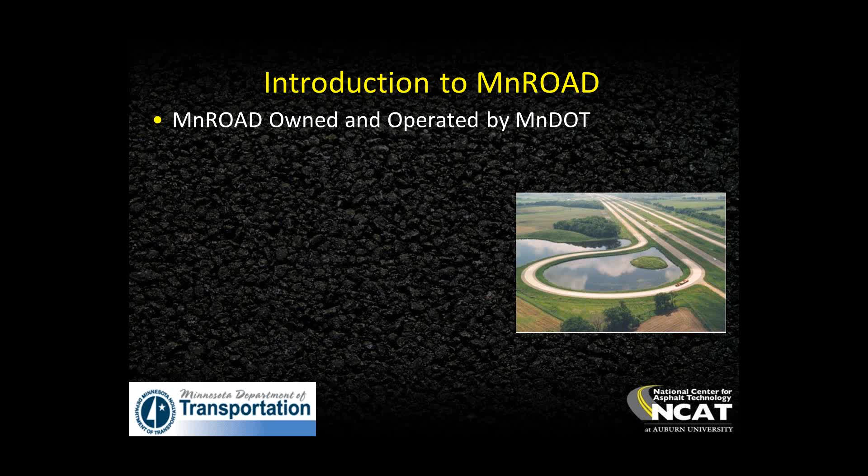MnROAD is owned and operated by Minnesota DOT. We've had 20 years of long-term customer service. Some of our customers have included Minnesota Department of Transportation, the Minnesota Local Road Research Board, which is cities and counties of Minnesota. We've done a lot of pooled funds with states and industry. Thanks again for listening.

Excuse me? Jason, are you hearing me? Yeah, you're fine.

Okay, we work with SHRP 2 and FHWA on national events, different types of pavement projects throughout the years. We've gone through our first 2 phases of research and now are finishing up our second phase, which is finishing up in 2016. Currently we're looking at our 3rd phase and looking at becoming more of a national facility to address different pavement questions that we have.

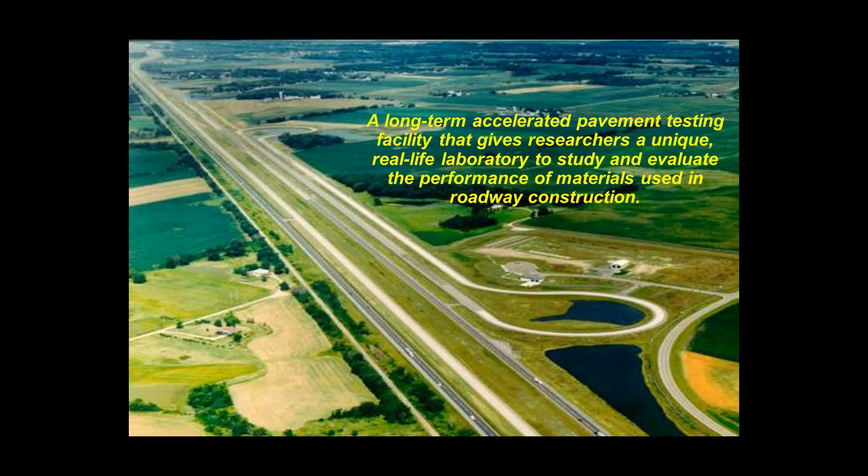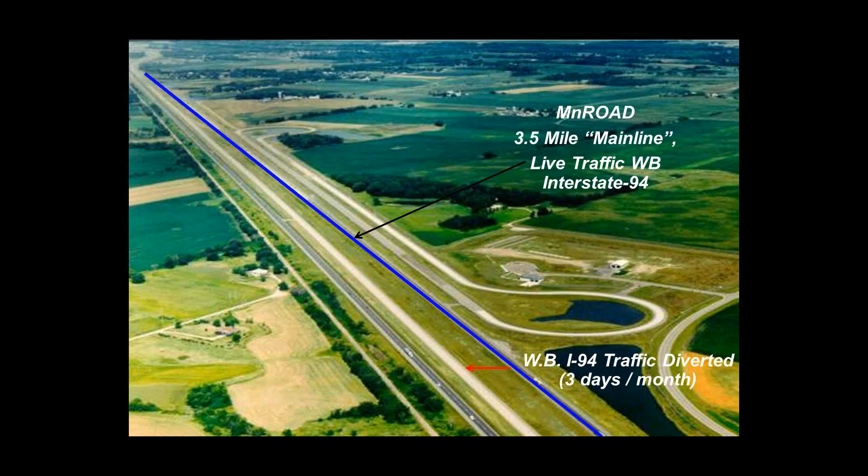MnROAD is an accelerated pavement testing facility located just northwest of Minneapolis-St. Paul. We built the sections along existing Interstate I-94, a mainline 3.5-mile stretch of roadway alongside there that we're able to move traffic back and forth as we need to. We typically move the traffic over 3 days a month to do different monitoring on that test section.

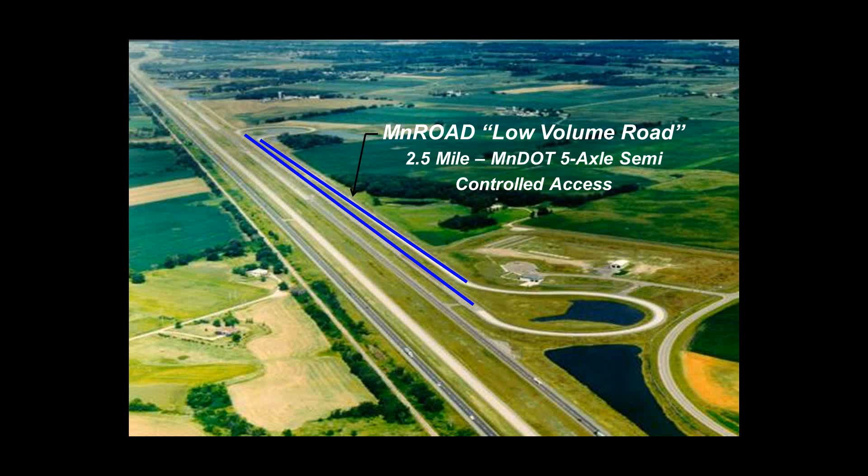We also have a controlled access low-volume road that the Local Road Research Board primarily funded to look at city and county designs. This has 2 one-mile stretches in this 2.5-mile loop.

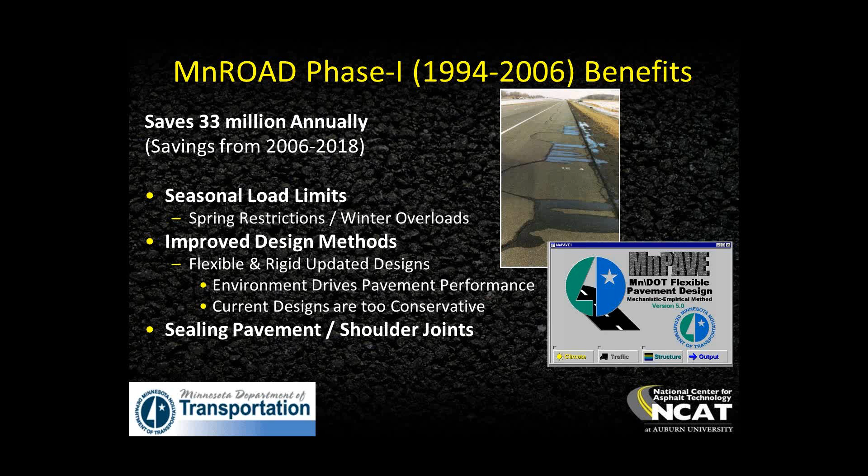Some of the benefits over the years that we've seen for our phase 1 related to developing models for predicting seasonal load limits - when to put on and take off spring restrictions and winter overloads. We've worked a lot on improving our designs used here in Minnesota and the northern states related to flexible and rigid updates. We found that environment drives pavement performance a lot more than we originally thought, and our current designs are typically much too conservative. We also found that sealing pavements and sealing shoulder joints can improve pavement performance quite a bit. These benefits saved us annually $33 million a year here in Minnesota.

Phase 2, we've been looking at the last 10 years, and we're just finishing up some of that research. We've done a lot of work relating to developing a performance test for low temperature cracking. We'll talk more about this later, but the idea is testing a material before it's placed in the road to ensure its performance.

We've also seen the power of using full depth reclamation on our roadways that are heavily cracked to remove that cracking and provide a good smooth surface. We've worked with industry and different groups on asphalt modification and the performance of those binders in our asphalt pavements. We've also worked with concrete, looking at improving concrete overlay designs, use of recycled materials in concrete including fibers, and how to diamond grind in the most effective manner. We've done a lot of work coming up with innovative diamond grinding along with concrete repairs.

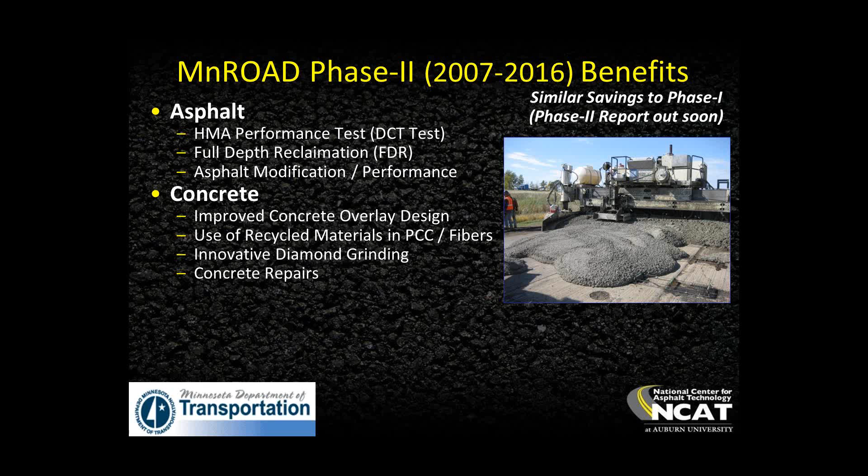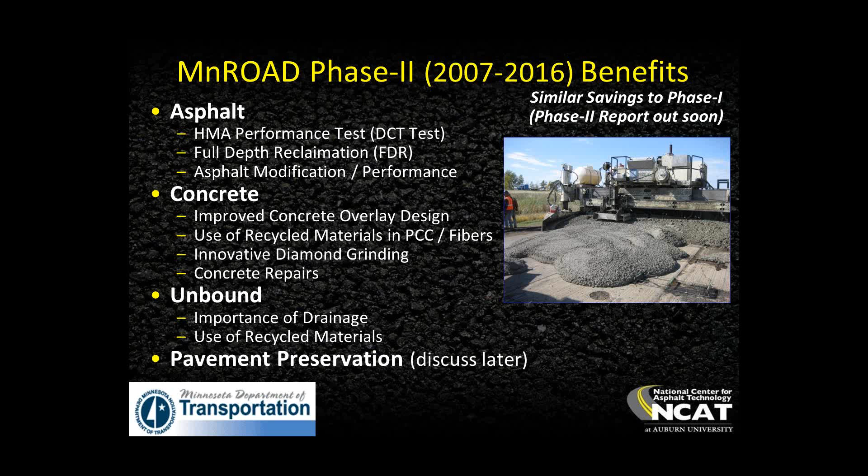We also found that unbound materials - we've done quite a bit of research related to the importance of drainage and coming up with a stable but drainable type of base, and how the use of recycled materials impacts performance and how those can be used most effectively in our roadways through the seasons that we go through. We'll talk a little more about pavement preservation later in this presentation.

Some of the future research we're looking at for our 3rd phase, when we come to it in 2017, is utilizing existing mainline old westbound concrete sections. We could do a lot of different overlays related to reflective cracking, and also utilizing the low volume road, looking at concrete and asphalt materials. Pavement preservation and rehabilitation will probably be the primary focus, along with some new construction.

Again, the strength of MnROAD is the same as the strength of NCAT in a lot of ways - we have a controlled real-life experiment with very little impact and risk to the public. We've been going on for quite a few years, since 1994. We've had long-term local support and experienced MnDOT staff that we've developed over the years to handle all the instrumentation, monitoring, and working with the different research studies we work on.

Again, we're coming up with accelerated findings and trying to get those implemented as fast as we can to get the benefits for our society. We've had local and national efforts.

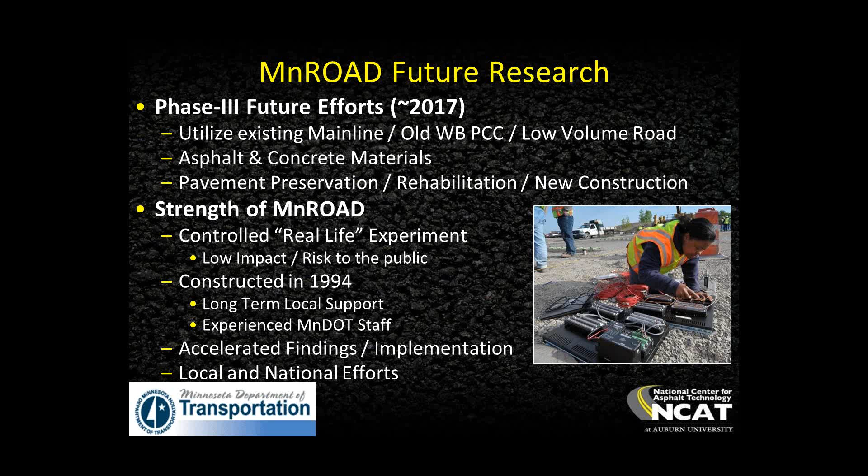We'll be going through some of these coming up at the start of February - we have a workshop here in Minnesota at the University of Minnesota, followed by an annual pavement conference. So that's our basic introduction to MnROAD, and now Randy can go into NCAT and their facility.

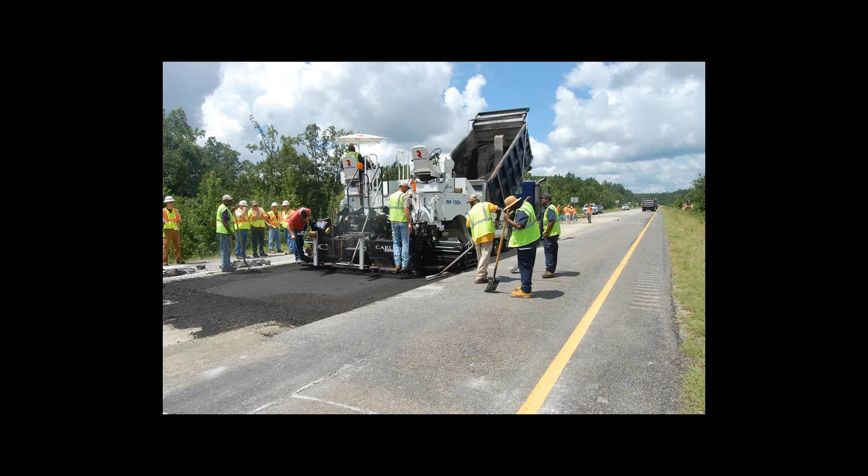The cost of each test section is based on 3 categories. The first is a surface layer experiment. The second is a full-depth structural study with stress-strain instrumentation. And the third is simply continuing traffic on a previously built test section.

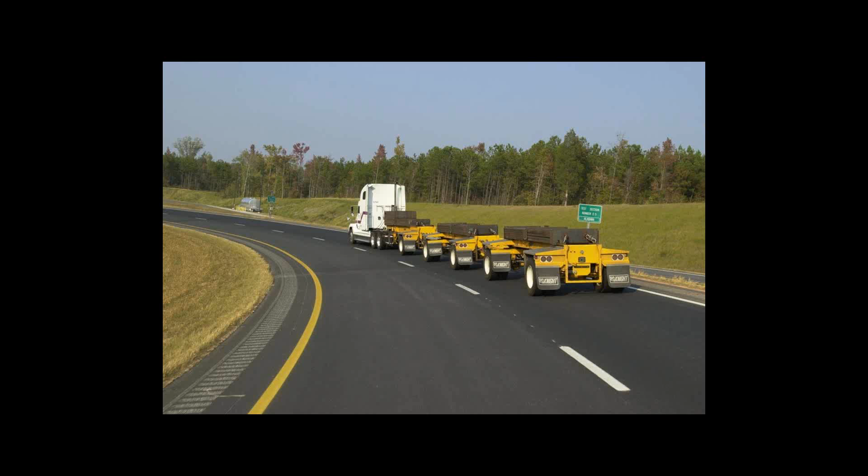We apply traffic loading with 5 trucks pulling triple trailers that run 2 8-hour shifts per day, 5 days a week. The axle loads are the maximum allowed on the interstate system. In each 3-year cycle, we apply 10 million 18-kip equivalent single axle loads.

In the first few cycles of research on the track, the focus was on refining many of the superpave specifications, such as proving fine-graded mixes work just as well as coarse-graded mixes, demonstrating the benefit of polymer-modified asphalts, and the benefits of SMA mixes. Research also showed that we should reduce the design compactive effort used in superpave mix designs.

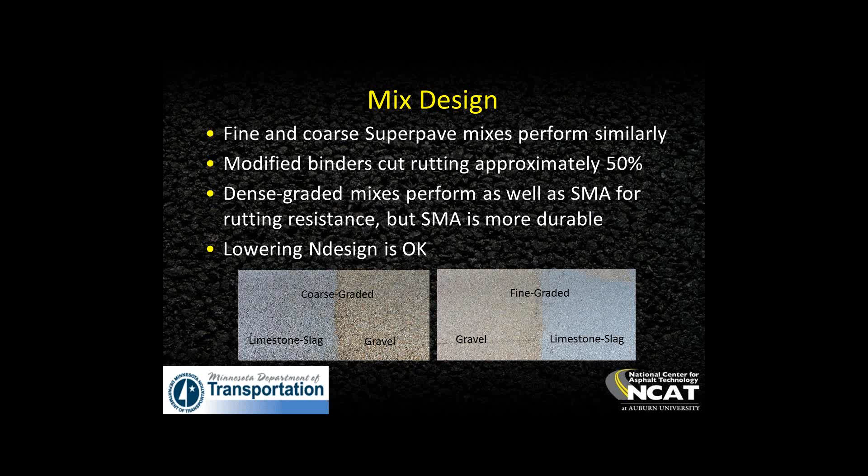Sponsors have also used the test sections to evaluate some of their aggregate specifications, and then took the findings from those and put them into practice right away, often leading to significant savings in aggregate cost in all or part of the state.

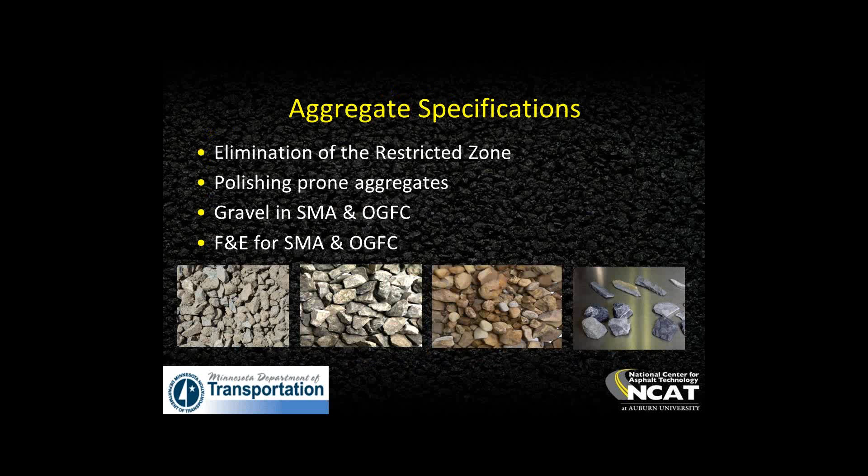Another very practical research was to find the limit for lab compacted air voids, a fairly universal pay item for asphalt construction. This research helped set the limit at which mixes should be removed and replaced.

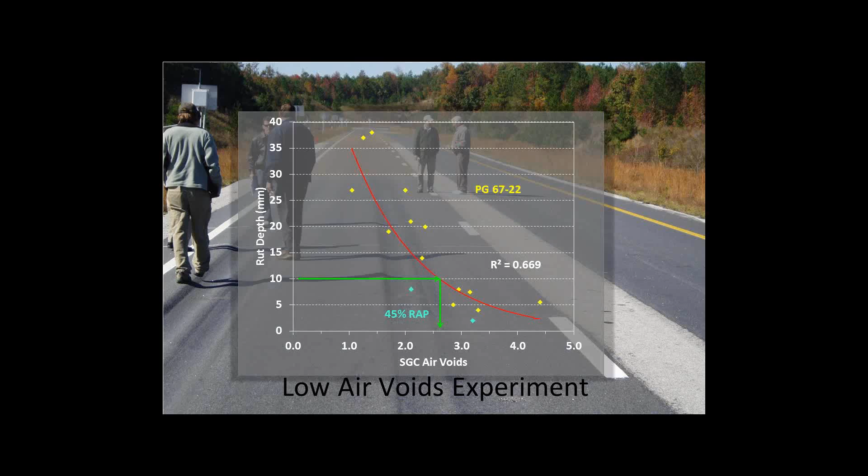In the last few cycles, the emphasis has been on the durability of pavements containing recycled materials such as RAP, recycled asphalt shingles, and ground tire rubber. We're figuring out how to optimize the mixes and the pavement structures to provide longer life and lower cost.

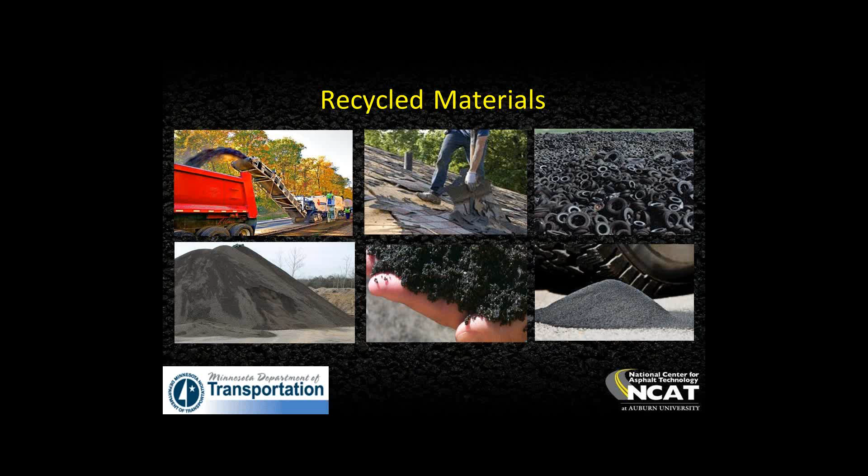We've also evaluated a variety of other mix additives to understand their added value in a real-world pavement environment. And we have also combined all of those materials with warm mix asphalt technologies in test sections.

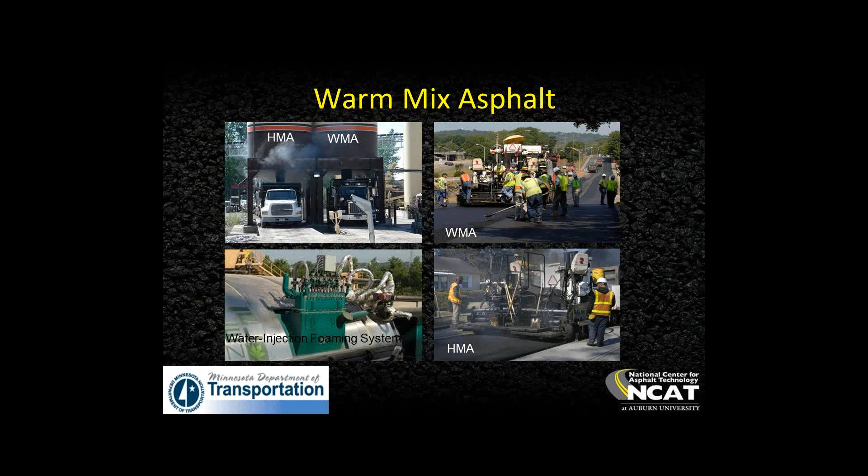The performance of each test section is very closely monitored for all forms of pavement distress, for structural health, and for friction. Some sections are designed to fail within 1 or 2 research cycles so that we can model the full life cycle of the materials and structures. Since the track is a closed facility, pavement failures do not cause any public safety issues or create political jeopardy.

The materials used in each test section are tested using the latest technology so that we can begin to establish stronger relationships between lab tests and field performance. This will enable us to better improve the specifications and performance of tomorrow's asphalt pavement.

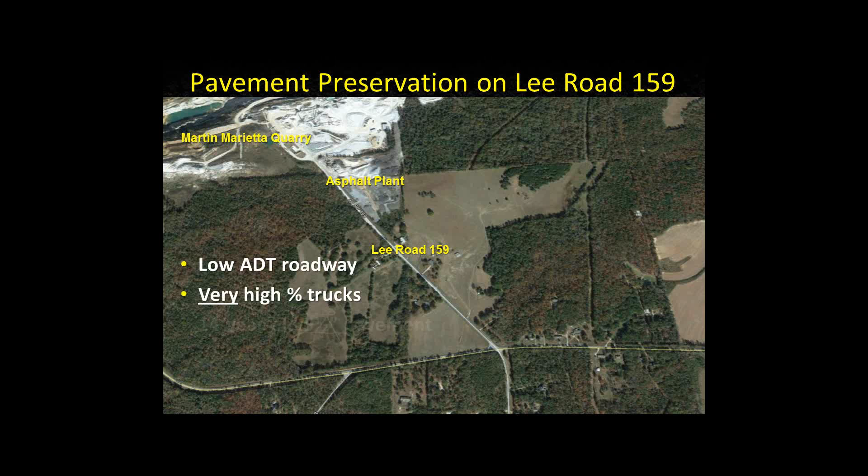In order to address this need that DOTs have, beginning in 2012, the 2012 research cycle, for the first time at the NCAT pavement test track, we built test sections off the track over on Lee Road 159. This is a very low ADT roadway with a very high percentage of trucks. It was a 14-year-old pavement, about 5.5 inches thick.

It had really diverse pavement condition because the road had evolved over time from a one-lane dirt road, widened and overlaid into a two-lane road. So between the wheel paths, there's significant differences in pavement condition. And you have empty trucks generally going into the quarry and the asphalt plant on this dead-end road, and generally loaded trucks that are leaving.

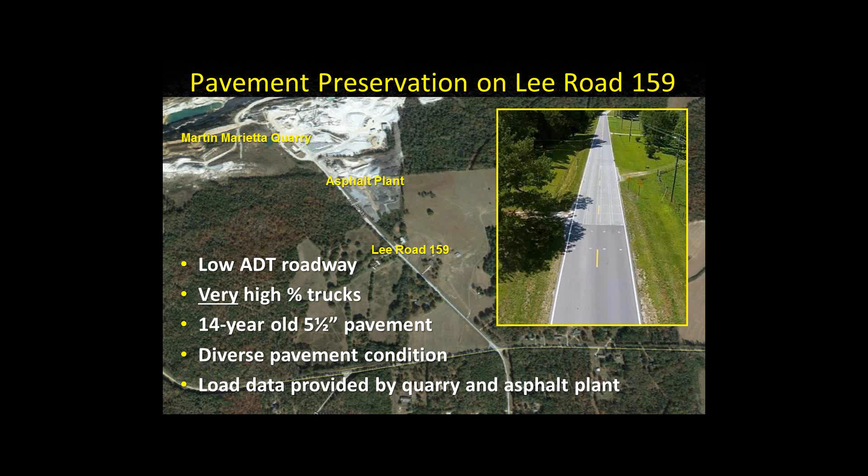We have a data sharing agreement with the quarry and the asphalt plant, so that in comparison to the test track where we precisely control our trucking and fleet operations, we're just exposed to commercial trucking on this road, but we have a very accurate record of unloaded truck weights going in and loaded truck weights coming out. So what we've done on this half-mile section of roadway is split it up into 25 test sections, as you can see from this aerial shot here, and in 100-foot sections that are 2 lanes wide, we have an array of pavement preservation test sections that were added to the track research plan.

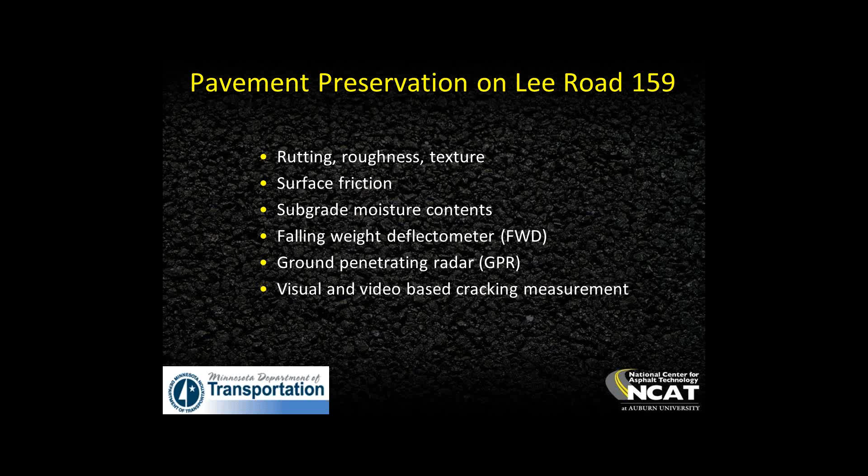We've done selective ground penetrating radar testing, and then we do visual and video-based crack mapping on Lee Road 159 like we do on the test track.

This is a baseline crack map for one of our treated test sections, shown in red because this was the cracking in place before the treatment was installed, back in July of 2012. To give you a sense of orientation, trucks drive into the quarry as they go from right to left in this section, and this is actually half a section because test sections out there are 2 lanes wide, so this is the inbound part. You can see the inside and outside wheel paths and how the pretreatment distresses relate to those orientations.

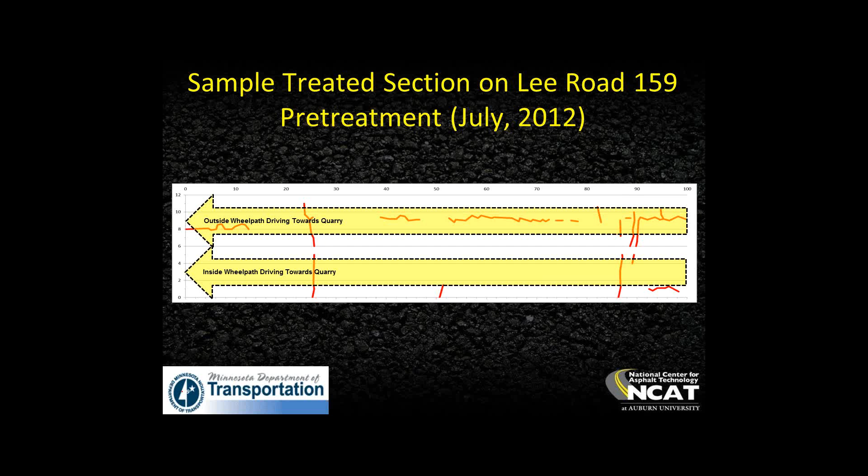We applied the treatments in the summer of 2012, which took our crack map back to no cracking. We got our first crack in this particular section the next summer in July, and I'll quickly progress through time to show how the cracking we measured in this section evolved over time.

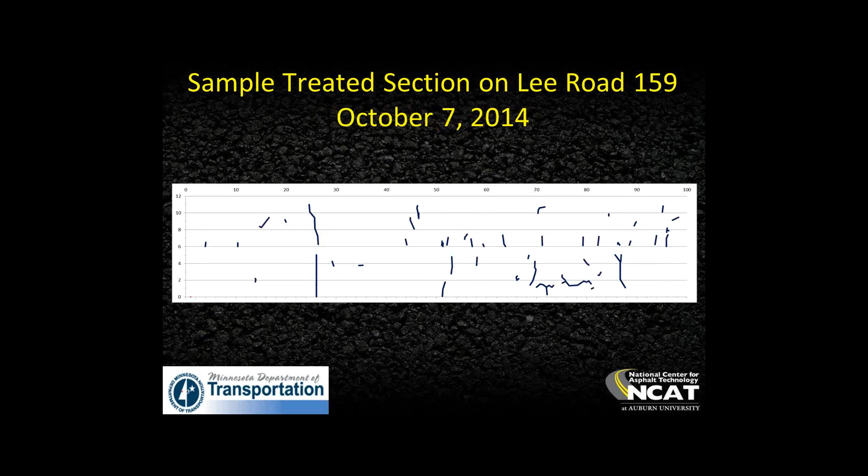So in that sense this is the terminal crack map for data that will be reported at the track conference. I'm going to overlay the pretreatment crack map on top of this, so you can see how the existing cracks out there relate to the pretreatment cracks in this section.

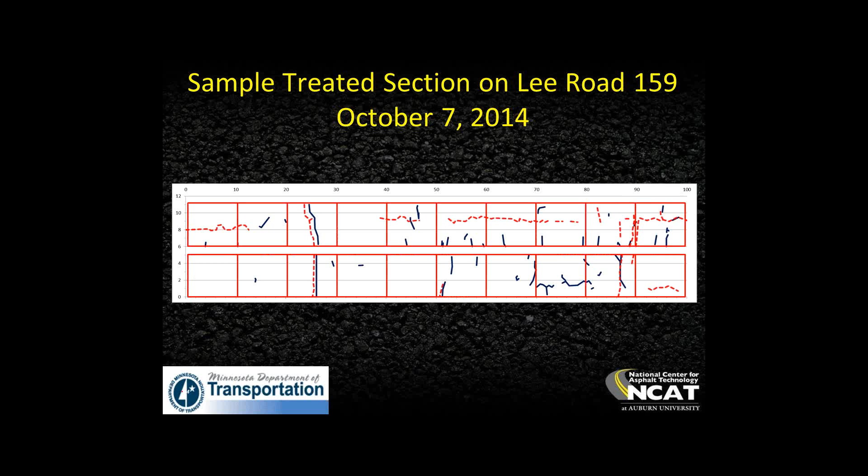Even though we have 25 test sections, you have to visualize that each individual test section has been subdivided into 20 subsections. We're discretely mapping all the distresses—roughness, rutting, texture, cracking—in terms of these 5-foot by 10-foot subsections. So there are 10 subsections in the half lane, 20 in the complete lane, and you can see how the cracking is distributed throughout.

This was important in the design of the experiment because we really needed a diverse set of pretreatment pavement conditions so we could capture the full range of treatment performance.

If you look at this overlay, the first thing we need to do is discount these two cells because that's actually where a water line, a water main, runs underneath the road. So that cracking really isn't representative of the potential of this treatment.

If you look at the rest of the subsections, I've highlighted in green the sections that you could argue are generally in really good condition, yellow the ones in medium condition, and finally in red the most serious distresses, the most serious cracking we have mapped out there.

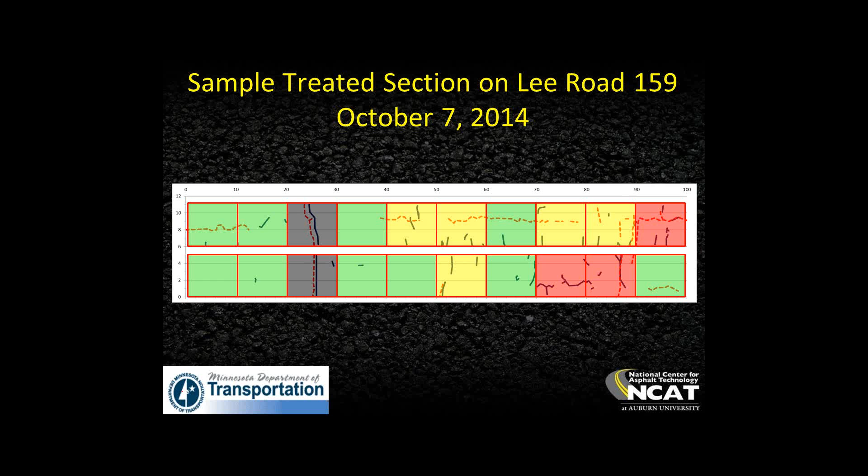If you move to this conceptual pavement life cycle curve, what that means is in each individual test section we have a surface map—a group of these 5-foot by 10-foot subsections—that fall into the prevention, rehabilitation, and reconstruction zones of the pavement life cycle curve. So we have a good distribution of points in our test sections that we have installed out there.

If we look at one of the 5-foot by 10-foot subsections that I'll highlight in yellow, when the treatment was applied, we reset that data point to a high level.

We monitor the trucking occurring out there on a regular basis, and as we do our weekly and monthly testing, we watch pavement condition change. What we're really looking for is to identify the life extending benefit of pavement preservation for each of the 5-foot by 10-foot subsections within the treated test sections. We also have the two control sections in place that we can monitor and look at their rate of change as a function of the exact same traffic over time.

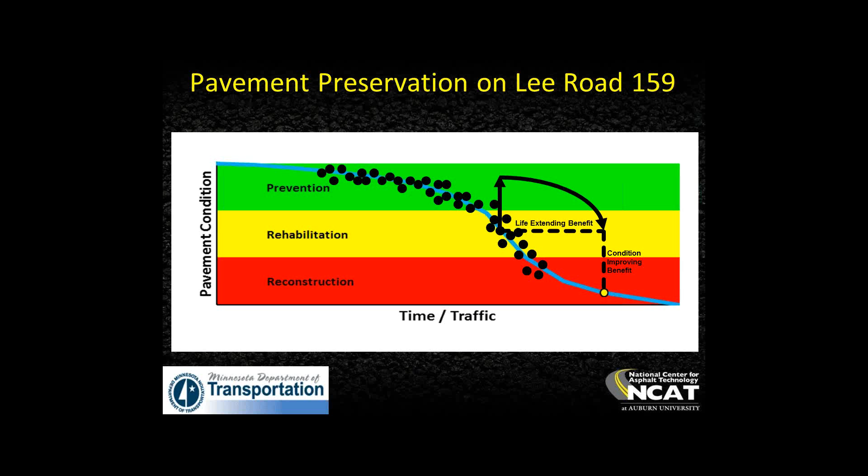We can predict what would have happened in that section had the treatment not been applied, which gives us a condition improving benefit. So those are the two key pieces of information. You need the life extending benefit for the decision tree to select the best life cycle cost alternative for preservation, and then you need the condition improving benefit so that you can take the diminishing resources that Mark mentioned at the beginning of the webinar and do build, no build cost scenarios for programming decisions.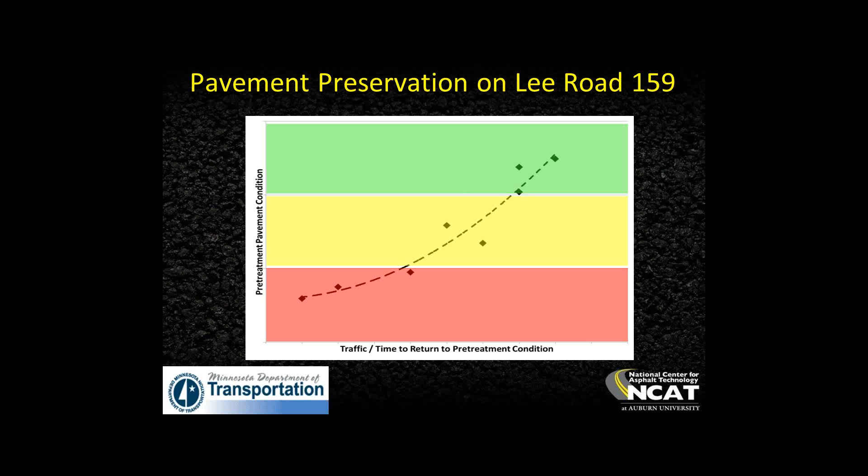So the objective, the deliverable of this study for each of the treatments in place and the treatment combinations that we have, because there are quite a few combinations of treatments, for example Cape seals and then HMA Cape seals, each of the test sections will produce an independent life extending benefit curve. These are points generated for each of the 5-foot by 10-foot subsections, an individual curve for each treatment. What you see is when you use a treatment on a pavement that's in bad condition, it doesn't take much traffic to return to pre-treatment. But as you improve condition, you get more time, more traffic, and longer life cycle performance. So this is the deliverable that will be produced from this experiment.

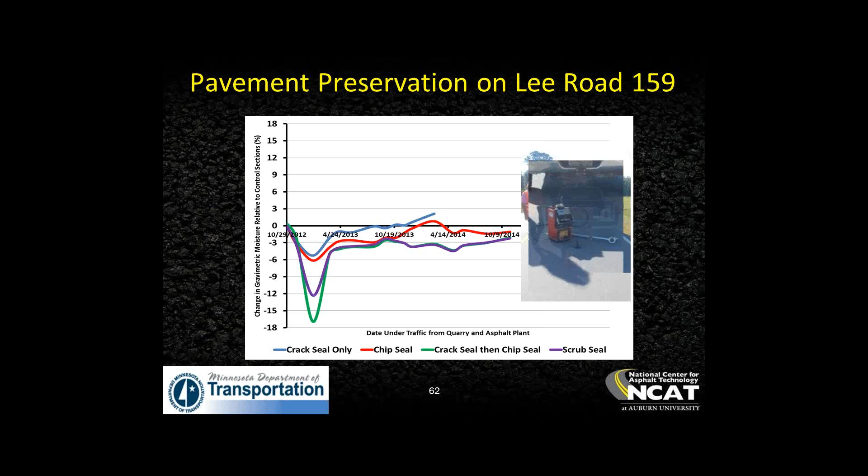Also important to mention is we have installed moisture tubes in the middle of each section on Lee Road 159. As you can see in this picture, the tube is installed in the middle of the section in the X direction and in the Y direction, so it's in between the wheel paths. This is a sealed tube with a cap that we screw off, and then we drop a nuclear moisture probe down in it, and we can do monthly moisture tests.

What you see in this graph is that in the first winter, the first wet season, there was a significant difference between the treated test sections and the control sections. Over time, in the second winter, for some of the sections that improvement sort of panned out and wasn't so significant. That's because cracking is occurring and more moisture is getting into the subgrade. So these measurements are important because we can see what's happening on the surface of the pavement. FWD testing and moisture testing tells us what's happening inside the pavement as cracking develops on these test sections.

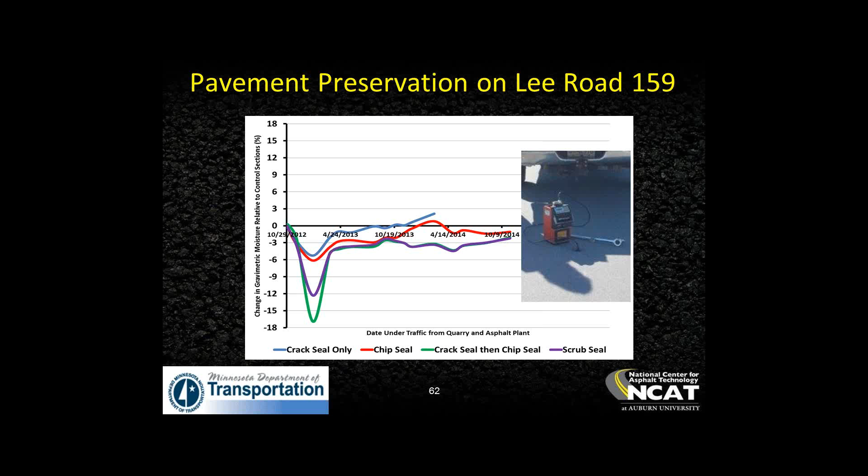So very quickly to summarize what we've seen on Lee Road 159: crack sealing appears to be beneficial in all cases, having a positive impact on crack development. There are differences between routing and sealing and blowing and banding. Scrub seals appear to exhibit both the crack seal benefit and the chip seal benefit, which is what you hear about with scrub seals. Preservation treatments do reduce subgrade moisture content, but in sections where cracking does develop, that benefit tends to taper off. Microsurface has been proven to be very durable.

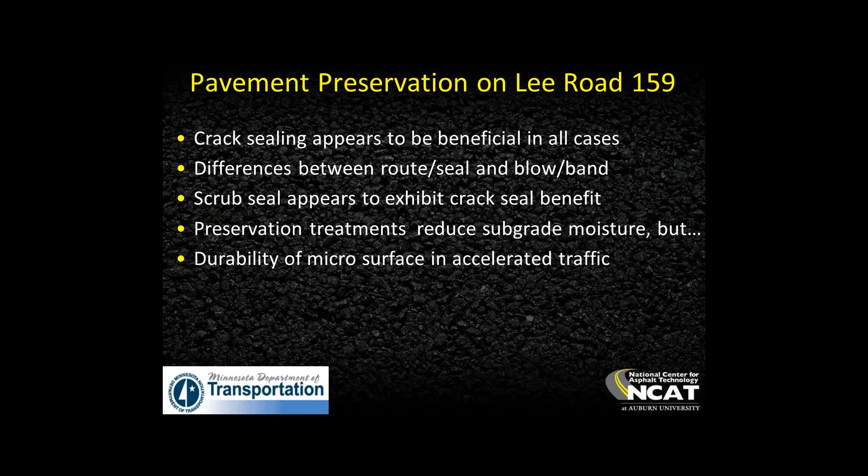We have some microsurface that we've also done on the test track. There are some comparison sections on the track that I don't have time to get into within this presentation. We are developing life-extending benefit curves. It's very exciting to go through the data to prepare for the synthesis report for the track conference and see how the data is behaving as we expected it to.

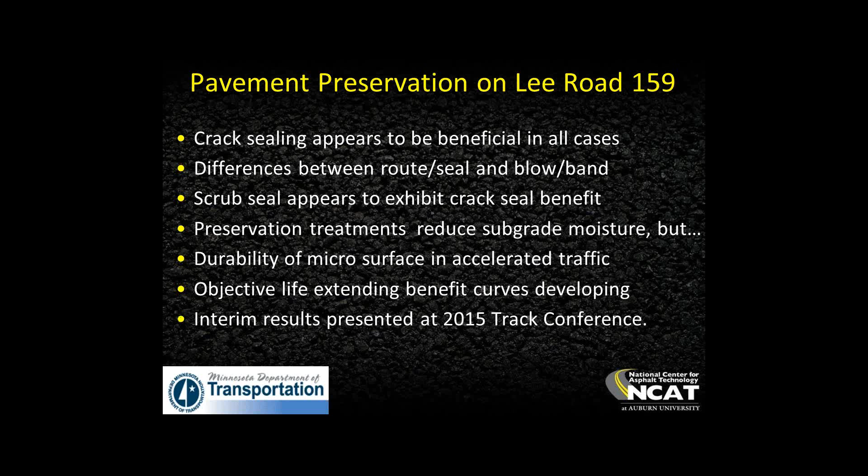We will be publishing those findings at the 2015 track conference. We would invite everybody to attend. It's March the 3rd through the 5th, so it's right around the corner. It'll be a 2.5-day event with a focus on the track and Lee Road 159, with tours of both facilities.

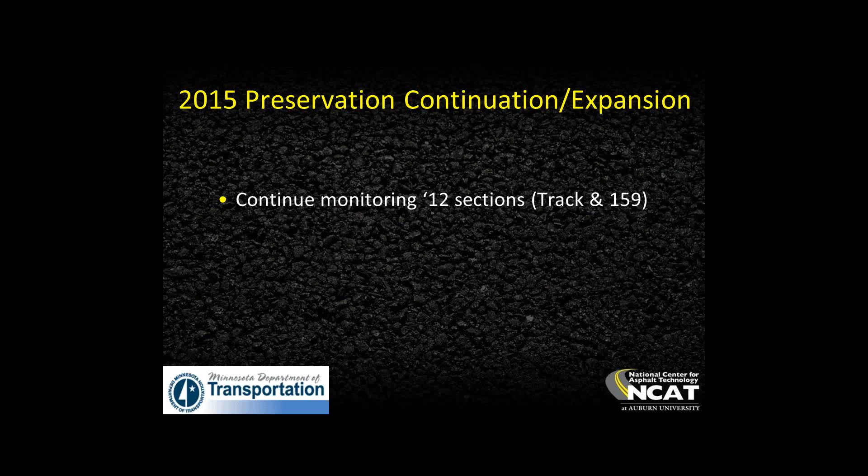These track conferences are hosted at the end of every 3-year research cycle. They're very important in our transition, the turning point between the last research cycle and the next one. There'll be discussion of the experiment we'll build in 2015. We will continue monitoring the sections on the track and on Lee Road 159, the pavement preservation sections, so that we can capture the life-extending benefit curves. We don't have that data point until we return to pretreatment condition.

I focused on cracking for this presentation, but obviously there are many other parameters that we're measuring on a weekly basis that are part of that. The MnROAD partnership will be a focus at the conference because it's a centerpiece of what we're doing in the 2015 research cycle.

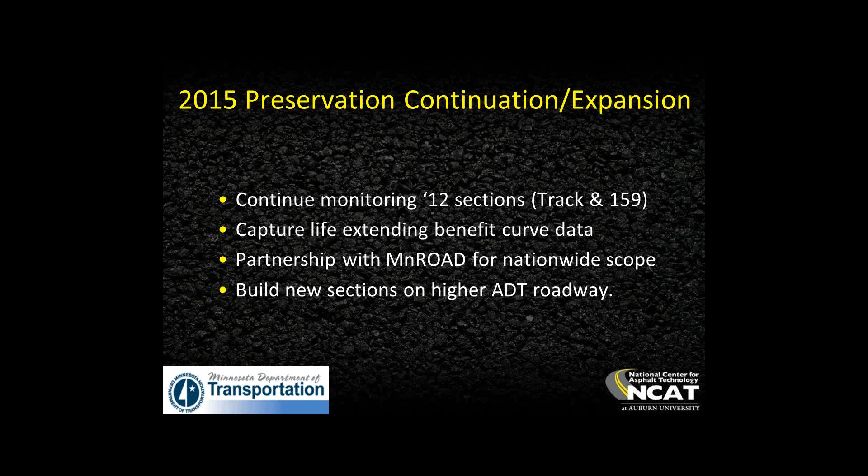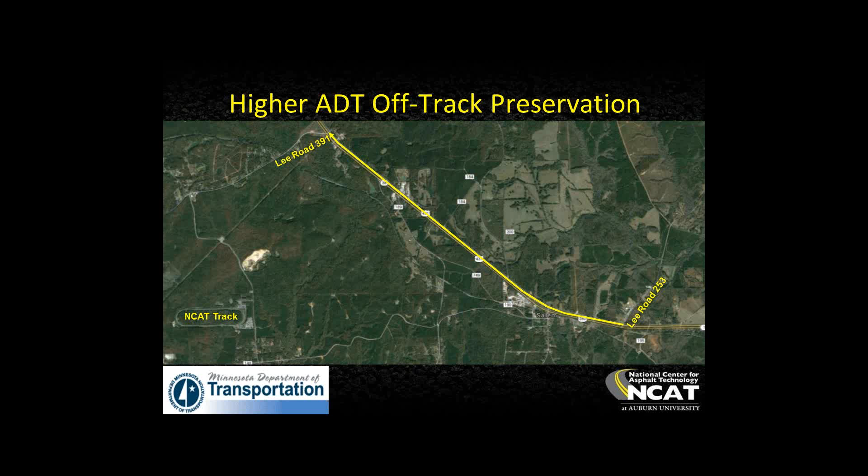We'll also build new sections on a higher ADT roadway. Showing you where the track is on this aerial photograph: there's Lee Road 253, and about 4.5 miles down US 280, you get to Lee Road 391, which is where you'd turn off to drive down to the test track. This is about 3 miles east of the track, very convenient for mobilization and material storage purposes.

This is a 17,000 ADT roadway, about 9 years old. The westbound outside lane, this is a divided 4-lane, so we're interested in the newer part that had a really balanced cut and fill, very level and very straight, about 4.5 miles.

We'll do 1/10 of a mile test sections out here, so it'll be data collection that can be interpreted in a way similar to how DOTs interpret their network level pavement condition surveys, but we'll still discretely monitor subsections within these sections, just like we've done over on Lee Road 159.

Our expectation is that we'll repeat the treatments on 159. The final experiment will be designed by the state DOTs that get on board to fund it, and it'll be done by consensus, but our expectation is that we'll repeat the treatments on Lee Road 159, and we're very excited to be adding recycled mixes. Our expectation is that we'll do some central plant recycling and in-place recycling, both using foam and emulsion, hopefully some hot in-place recycling as well, and then overlay those with high binder replacement thin overlays.

So in that sense, it has a really good connection to the cracking group experiment that will also be a big part of the 2015 research cycle, because we've got to make sure that these thin overlays with a lot of reclaimed and recycled binder in them have a really good level of cracking resistance to give us good performance.

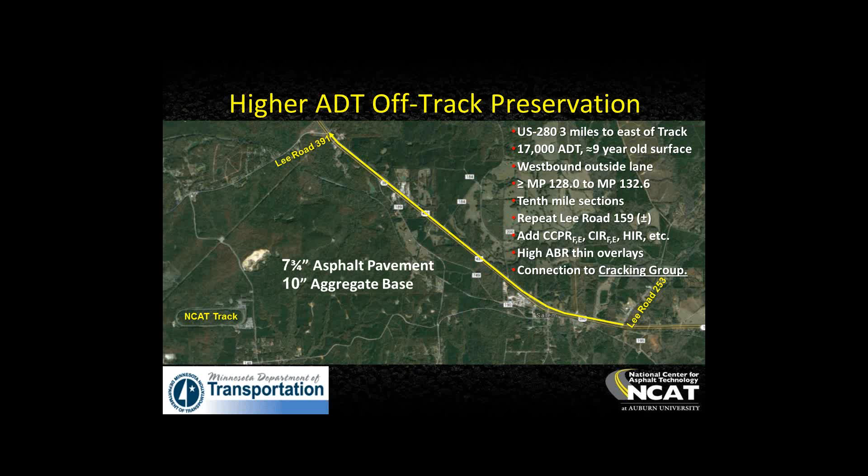This section of US 280 is about 7 3/4 inches of asphalt pavement on 10 inches of aggregate base. Here's a shot of the road, and you can see the eastbound lanes are the original 2 lanes of US 280, and they didn't do as good a job balancing the cut and fill, so it's kind of a roller coaster ride over there. But the westbound lanes are flat and straight.

Looking at the outside lanes, the truck lanes on this roadway, there's a nice distribution of pavement surface cracking, and there's a close-up view of the cracking in the outside wheel path.

So at this point, I'm going to hand back off to Ben Worel at Minnesota.

Thanks, Buzz. Again, we're going to talk a little bit about MnROAD and some of the work we've done in the past related to pavement preservation. We've done quite a bit of work related to Minimac and microsurfacing, basically related to rutting and ride.

We found that the more you work on these types of repairs, the longer the life and the smoother the road can be. We've also found that flexible microsurfacing here in the north, even on roads in poor condition, can last longer than we expected. So it is an effective treatment for our roadways, and we'd like to look at this even more.

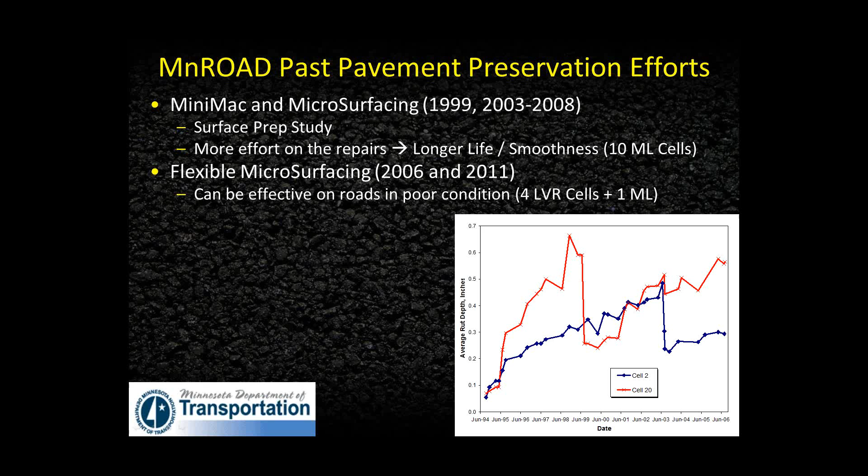You can kind of see the rutting and the fills that we did, looking at rut depth over dates and how microsurfacing and using the Minimac has improved our system.

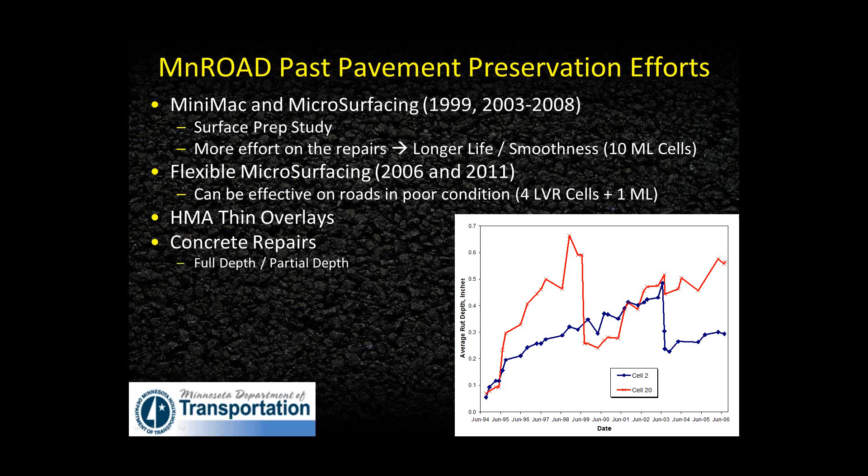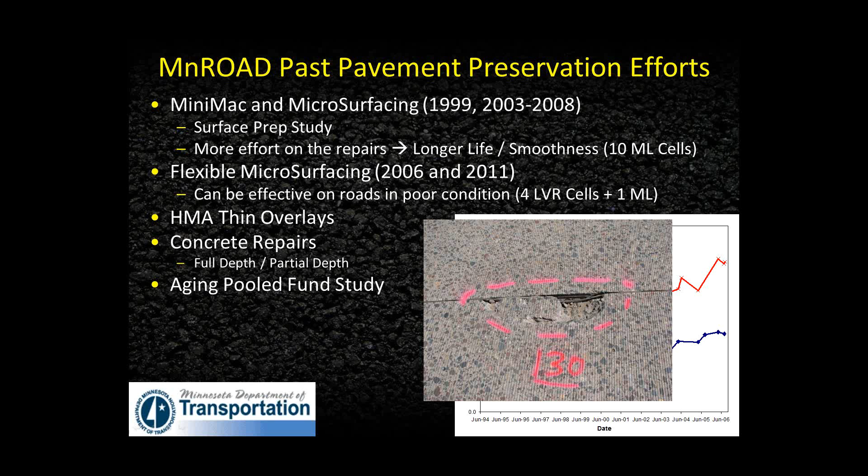We've also done some work with the Aging Pooled Fund study. The Asphalt Institute is just finishing up a study looking at when the proper time is, related to the binder and its aging, that a treatment should be placed. And it's finding that you need to put the treatment right away to prevent that aging of the asphalt. This isn't performance data, but it's one indicator saying that pavement preservation is beneficial.

We've also done some work on chip seals on our low-volume road, but we've also done some high-speed chip seals in 2014 with the R26 group that came out here this summer.

Tom Wood helped pull this together. He did a really nice video on how this is done in the application of using chip seals.

With this, we're trying to look at what is high speed and when it can be used. Each different agency looks at volume differently, what is high volume. We're looking at using these types of applications on higher speed and higher volume roadways such as interstates. All these different types of service work we've done in the past will fit well into the analysis method that NCAT's developed to create these different types of curves, and the information we've done in the past can be utilized.

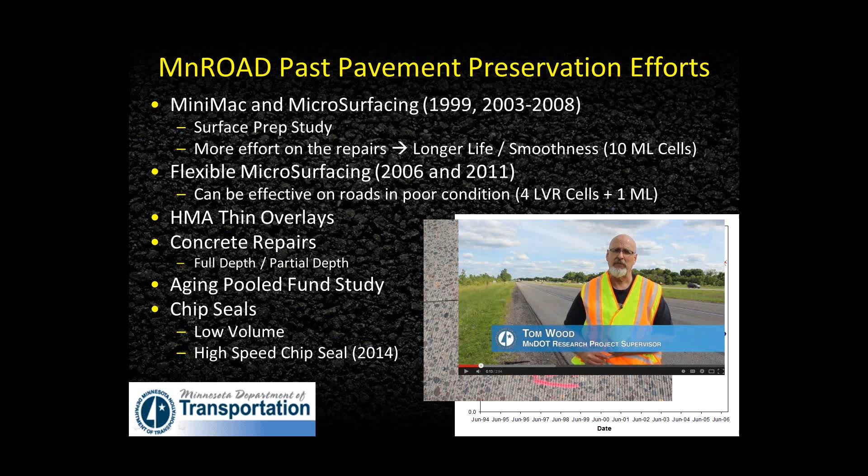This partnership we developed with NCAT, we've worked with them in the past for quite a bit, but nothing's been formal, it's all been informal. But in June of 2014, this summer, NCAT came up to MnROAD and we started the discussion. We followed that up with a meeting down at NCAT where a number of us from Minnesota went down there, and started talking about this partnership.

This partnership has included FP Squared and the National Center for Pavement Preservation. They've been part of these discussions, which is very good. Some of the benefits we're seeing are the individual strengths of each other. They do some good stuff, we do some good stuff, and our efforts combined is even better.

Operationally, data sharing, analysis, the collection of data, the consistency of the data, I think can be improved by this partnership. And I think we'll have a greater appeal nationally. We're working with NCAT in the south and with Minnesota in the north. It covers quite a bit of a range of extreme climate conditions.

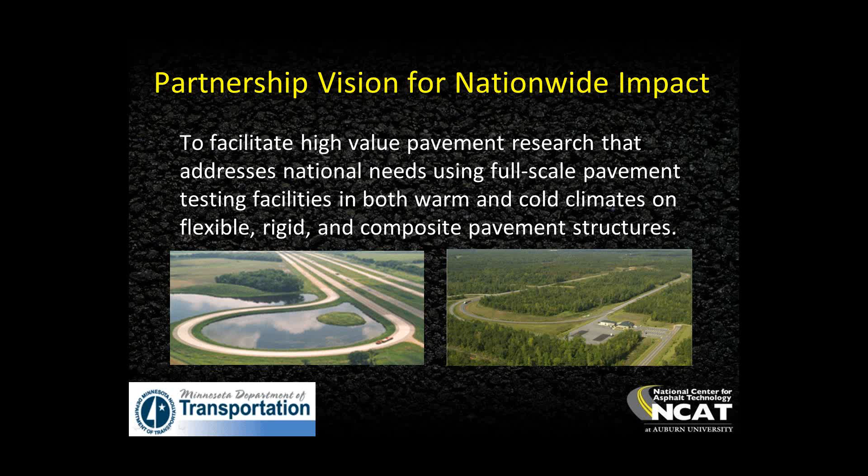The partnership vision is for nationwide impact, and we want to facilitate high-value pavement research that addresses national needs, utilizing full-scale pavement testing facilities in both warm and cold climates on flexible, rigid, and composite pavements.

Nationally, we've been acknowledged, and different magazines have been put out looking at the R26 that was done at MnROAD last summer, with a nice article talking about the partnership and where we see we're going with this partnership related to pavement preservation.

On this national focus and the direction we're going, Buzz talked a lot about the NCAT facility and the use of test sections there, along with the Lee Road 159 low volume road, but also the high volume road they're developing. Here at MnROAD, we'll be looking at the same thing, utilizing the test facility, past and future research related to pavement preservation, but we're also going to look off-site to develop our Lee Road 159 and our US 280 for both high and low volume roadways in similar situations.

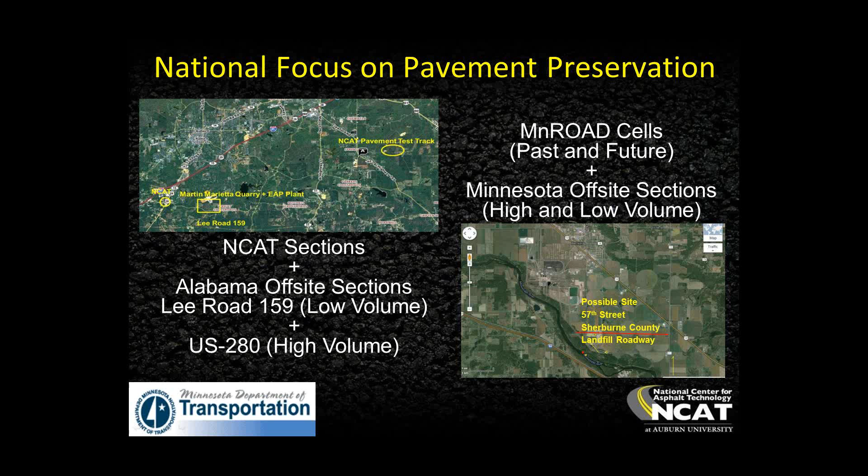There's a picture showing we have a landfill nearby that could be utilized similar to the asphalt quarry that they're utilizing in Alabama.

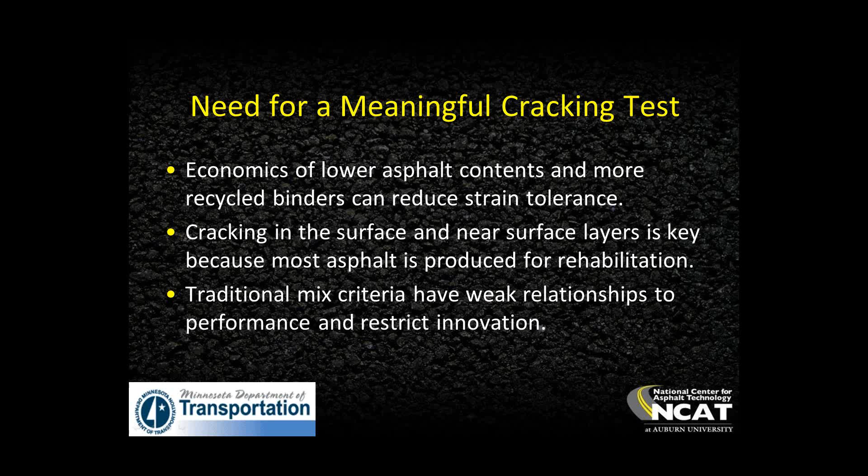Part of it we talked about thin overlays and different efforts going on, which some people consider to be pavement preservation. This ties back into what NCAT and Minnesota are doing related to coming up with performance tests related to cracking. As we try to economically use lower asphalt contents and more recycled binders, we reduce the strain tolerance. The cracking in the surface and near-surface layers is key because most asphalt is produced for rehabilitation, and traditionally mix criteria have weak relationships with performance and restrict innovation.

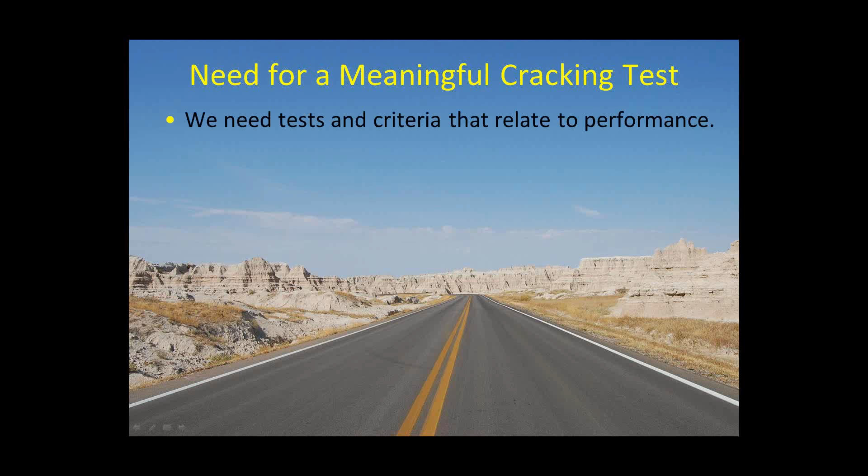So there's a need for a meaningful cracking test, especially for these thin layers related to pavement performance or pavement preservation, so we need a test and a criteria to relate to performance. We need tests that are practical for both mix design verification and quality control testing purposes, and tests that can accommodate recycled materials and new and future additives and combinations thereof.

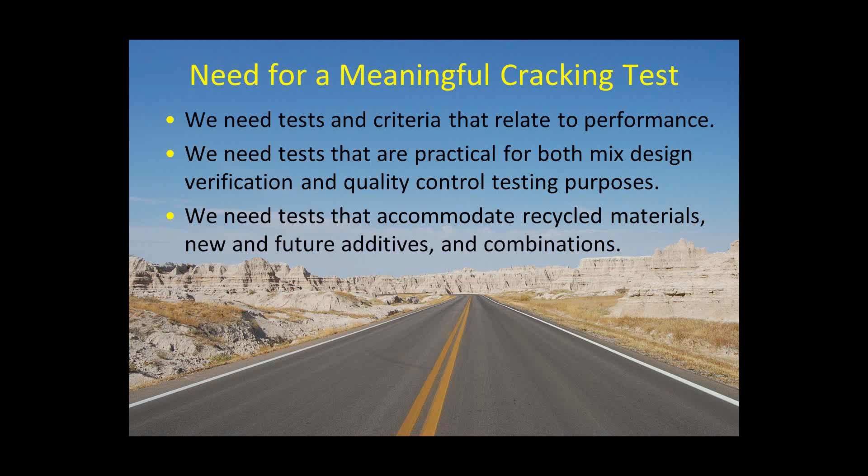The efforts we're going to do related to that cracking test and this pavement preservation proposal involve looking at top-down, reflective, and low-temperature cracking. We're looking at mixtures over both concrete and asphalt. We want to look at the range of expected cracking susceptibilities by taking mixes that we expect to crack, with a low fracture energy if you use the DCT, versus high fracture energy mixes that shouldn't crack.

We want to try these things out in the field at both facilities and see how they work. We also want to sample the plant for a lot of lab testing to confirm the results we get from these different types of cracking tests. Minnesota's MnROAD has both concrete that can be overlaid and asphalt, while at NCAT we'd be mostly looking at the asphalt area.

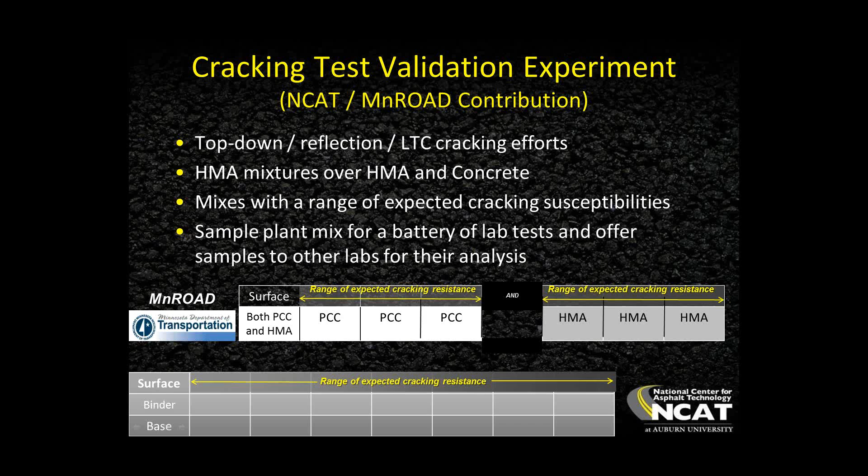So these are the different types of cracking tests that are out there. Minnesota's been working with the DCT and the SCB, but there are a number of other types of cracking that will be investigated through this cracking experiment that NCAT is proposing.

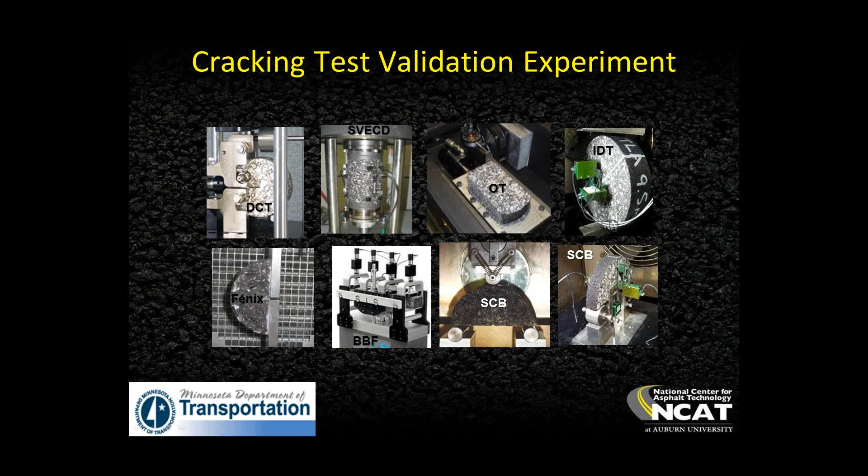So with that, I'd like to pass it on to Mary to go over some of the benefits of the sponsorship. Thank you, Ben. Hi, this is Mary Robbins here at NCAT. I'm going to talk to you about some of the benefits and how you can get involved in this partnership.

One of the important aspects of these research efforts is that they are designed to meet the needs of our agencies and sponsoring organizations. As a sponsor, you truly have a voice in the design of these experiments. The funding is turnkey, meaning that the funding you provide covers the full 3-year research cycle.

And is all-inclusive. Built into the sponsorship fees are the travel funds to be on hand at the time of construction, and travel funds for representatives to attend the 6-month sponsor meetings. At these meetings, we provide updates on the experiment, and it enables our sponsors a chance to interact with one another and provide feedback on the study.

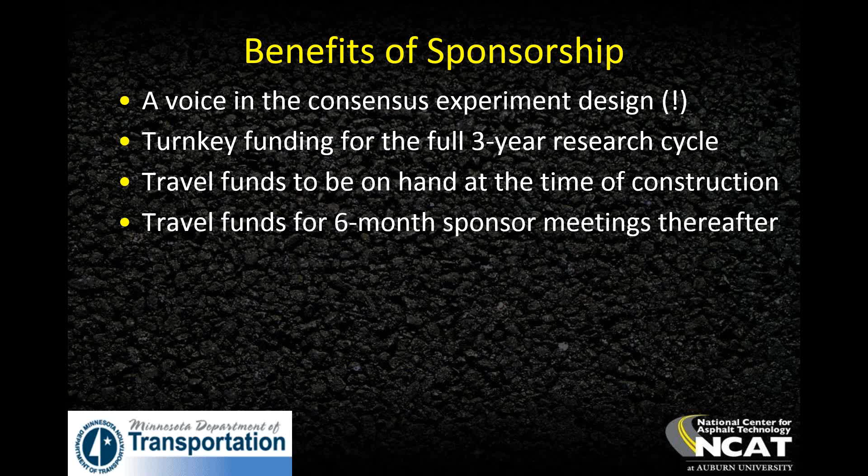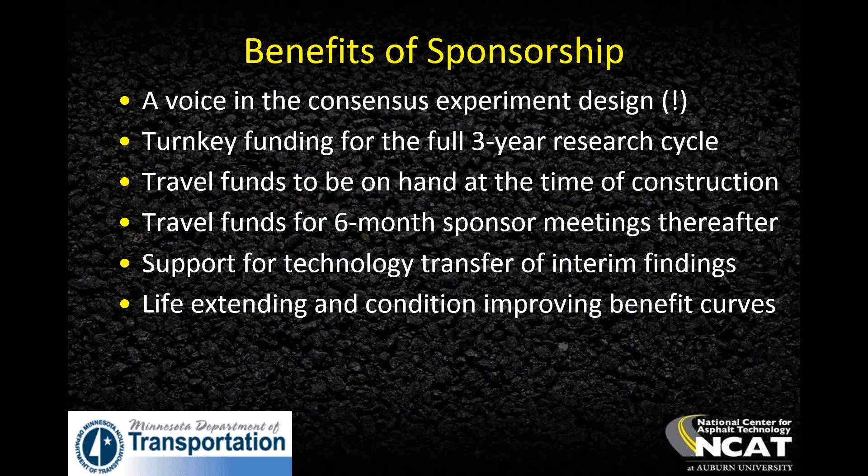Additionally, we can provide support necessary to help with technology transfer of important interim findings, so you don't have to wait until the end of the 3-year cycle to get the ball rolling and start to benefit from your investment. The key outcomes expected from these experiments include the development of life-extending benefit curves and the relative condition-improving benefit for the various pavement preservation treatments.

And as a result of the cracking group experiment, recommendations are expected for cracking tests for implementation. Another expected outcome is the development of specifications and best practices for the placement of pavement preservation treatments.

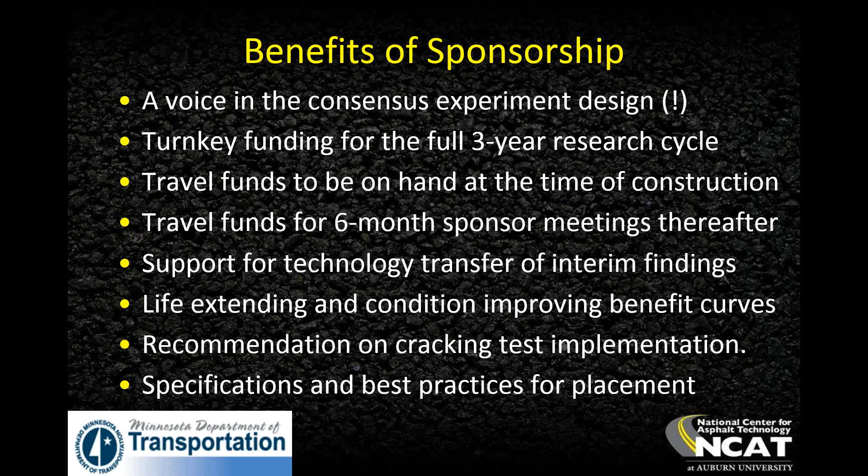While the cost structure of these experiments is similar, there are also some differences due to the nature of these experiments. For the PG study, the cost for the first 3 years is $120,000 per year. Because we expect this experiment to continue beyond this initial period, the funding is front-loaded to support the cost of construction and startup. However, beyond the first 3 years, the cost will drop significantly, leading into year 4 with an estimated cost of $40,000 per year.

For the cracking group study, sections will be designed to fail within the 3-year project timeline by building these sections slightly thinner. The cost associated with this experiment is set at $210,000 per year, totaling $630,000 over the 3-year period. Please keep in mind these costs are all inclusive, including the cost of construction, associated trafficking, as well as funds for sponsor travel during construction and for 6-month sponsor meetings.

However, for this partnership between MnROAD and NCAT to exist, we really need the support of those northern states. So you may be asking, how can you get involved?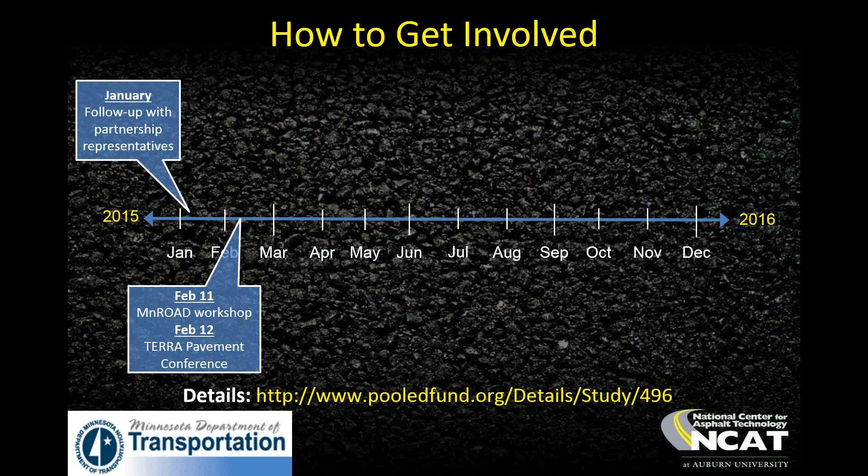If you are interested, please keep in mind that we will need someone from your organization to complete our standard letter of commitment to the preservation group and/or cracking group studies, ideally by the end of February. This is a form started by NCAT and completed and signed by someone within your organization with commitment authority, stating your intent to financially support one or both of the group experiments in the prescribed amounts. This secures your spot at the table so you may be involved in future discussions about the design of the experiments.

The Test Track Conference will be held on March 3rd through the 5th here in Auburn, Alabama. Practical findings from the 2012 research cycle, resulting from research on the NCAT pavement test track as well as MnROAD, will be presented in a series of technical sessions with a focus on implementation. As part of the conference, we will also tour both facilities. This is another opportunity to see firsthand the types of work being done and some of the implementable findings that are coming out of these efforts.

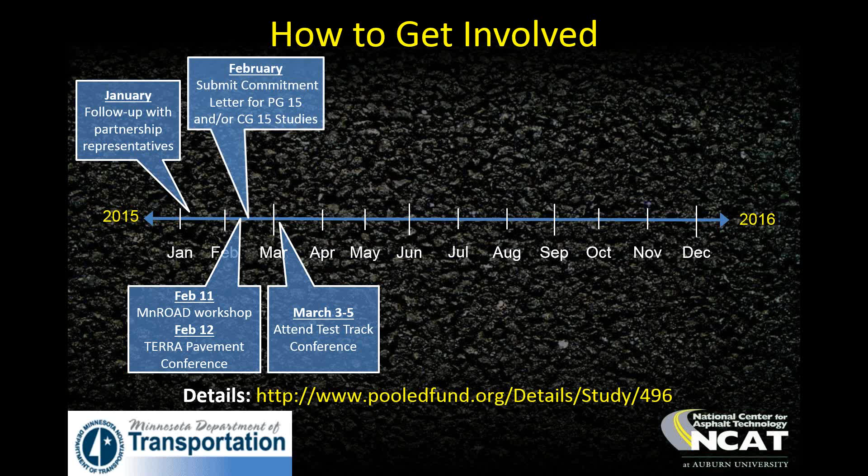Registration information is available on NCAT's website. This conference also serves as one of the last opportunities for getting those commitment letters in. For state agencies that have a very strong interest in one or both experiments and believe that your agency's participation is viable, please contact Buzz Powell, as financial support may be available on a limited basis for travel to the Test Track Conference.

Planning for the CG and PG studies will get underway this spring. This is where your voice really matters. As a sponsor, you help direct the design of these experiments, but in order to have a voice in the design, you will need to be a funding partner, and we will need to have your letter of commitment prior to the start of these discussions.

Once we've come to a consensus on the design of these experiments, construction will begin in the summer of 2015. And in the fall of 2015, we will hold the first 6-month sponsor meeting on site. Sponsor meetings will be held about every 6 months, in which updates will be provided and feedback on the direction of the research effort will be sought.

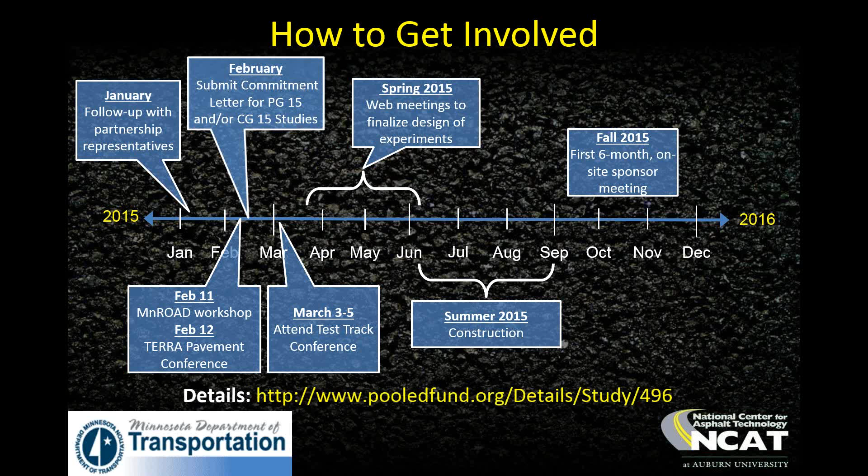These experiments will be conducted as a pooled fund, and final commitment will need to come in the form of sponsorship through this pooled fund. You can find more details at the link at the bottom of your screen.

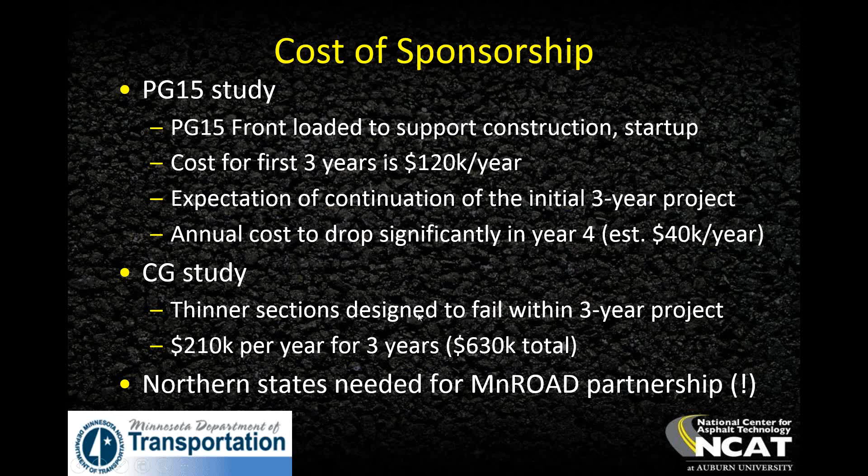Okay, the next question is: is the thinking that states will use SP&R funding for participation? The pool fund is approved for 100% SP&R funds. And how many cells does MnDOT and NCAT plan to build for the cracking study?

Ben, you want to handle that one, or would you like for me to do it down here first? I can start out. The cracking study is very important to Minnesota because we've been looking at it related to low temperature cracking or thermal cracks, but we see that this type of test might be beneficial for all types of cracking. So one of our major emphases is verifying the different models we've developed for this, and a major effort will be put toward that. I don't exactly know how many test sections yet, and it depends on the different types of funding we develop here at MnROAD, separate from this, to develop that cracking test in Minnesota. But we can utilize the old westbound concrete to look at different types of overlays with reflective cracking, along with a number of our test sections related to reflective cracking on asphalt. So we're still in the process of developing that, but it's going to be one of our key areas.